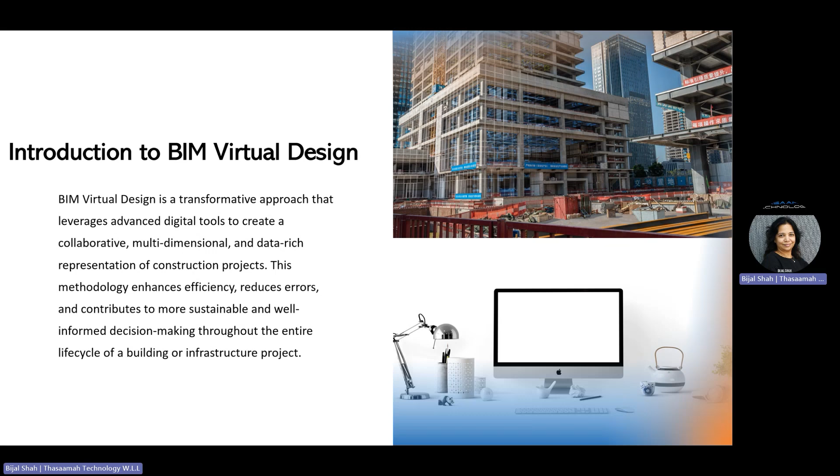So this was a quick overview where we came to know what BIM with virtual design is. Now let's check some of the benefits with that.

In case of benefits with virtual design, the first thing we come to know is collaboration, which is actually happening with BIM technology. But if we add virtual design integration on top of that, it promotes collaboration by breaking down silos between different disciplines. Architects, engineers, and contractors can concurrently work on the same model—that is something fantastic.

At the same time, it helps with visualization. It gives us a realistic, detailed design, providing a level of clarity and insight that was previously unattainable.

Efficiency is definitely increased and improved here. This particular technology, with integration on BIM, streamlines the design and construction process, and at the same time reduces the number of clashes and conflicts during construction. This leads to a more efficient workflow, minimizing delays and definitely cost overruns.

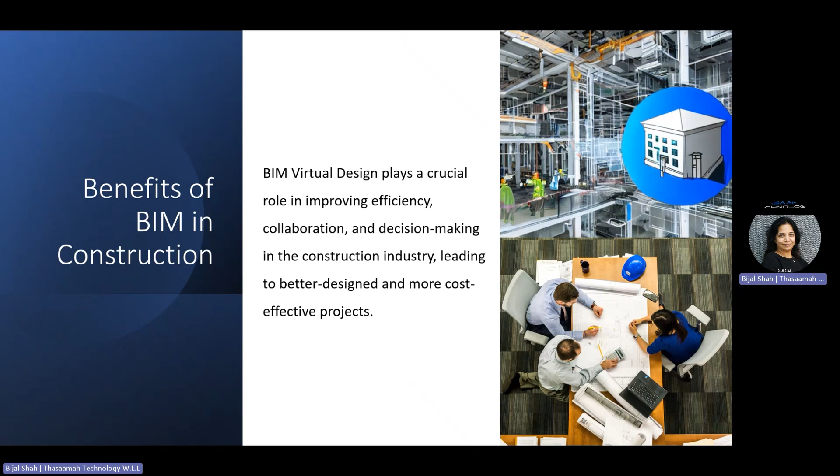Now, when we started our journey with BIM, we were facing some challenges. What were the challenges? We were not able to use multiple tools effectively. Okay, multiple tools were available, but there was no interoperability or integration between those tools. So do we have any solution for that right now? And if there is a solution, what is it, and how do we utilize it?

So in that case, we'll be talking about the challenge of data interoperability. We all know BIM is a technology, but there are multiple solutions and multiple OEMs creating and developing this BIM technology. So when we want to connect from one BIM technology to another, or create data exchange between two platforms, do we have a solution? Yes, we have a solution now—we can address that challenge with open BIM technology.

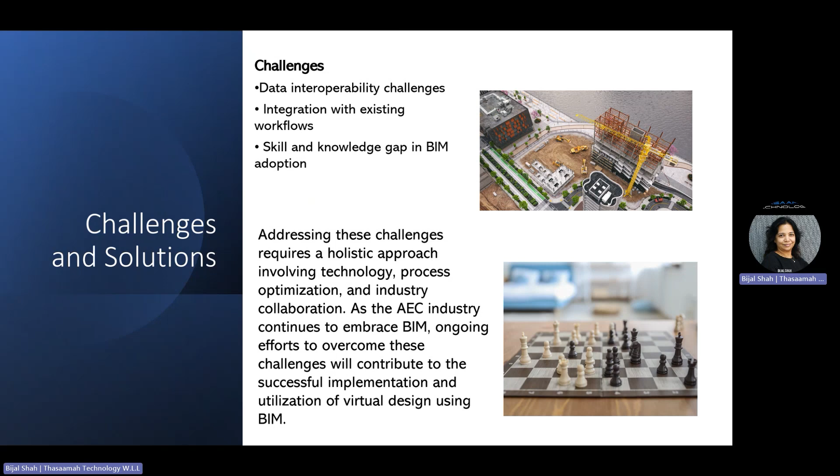I'm talking about implementation. So what all things should be there when we talk about implementation? The first thing is you all must have heard about BEP. What is that BEP? It's a BIM Execution Plan. So that execution plan should be there with clear project goals.

And at the same time, it should be a collaborative approach among the stakeholders. It should not be that way that one team is ready to adopt, second team is not ready to adopt, or one company is doing it, second company is not ready to accept it.

It should be simple and straightforward with a collaborative approach, and standard training with project requirements. With project requirement means what? In case I have done a training, I know the tools now, but where to utilize that tool? That is called a workflow, or else you can say that is called implementation.

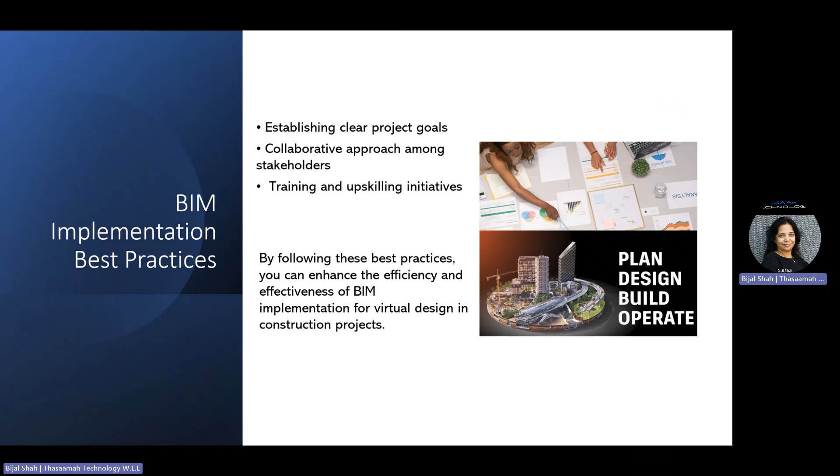So yes, training and upskilling initiatives should be there. By following this best practice, we can achieve efficiency and effectiveness with BIM implementation for virtual design and construction project.

Now, when we are talking about virtual design, there is a tool called virtual reality, a technology called virtual reality. So how does this particular virtual reality help us with our BIM technology? Let's have a look at one simple application which was launched a few years back with integration with one of the BIM technologies, Revit software.

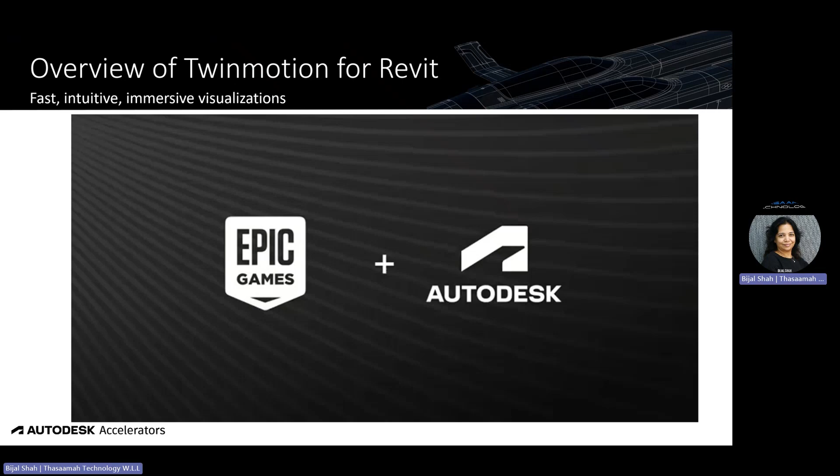And this tool is Twinmotion, a real-time visualization tool called Twinmotion. There was a simple collaboration that happened a few years back between Epic Games and Autodesk, and they came out with the solution of taking Revit models to Twinmotion for real-time visualization. So here is a small example of that.

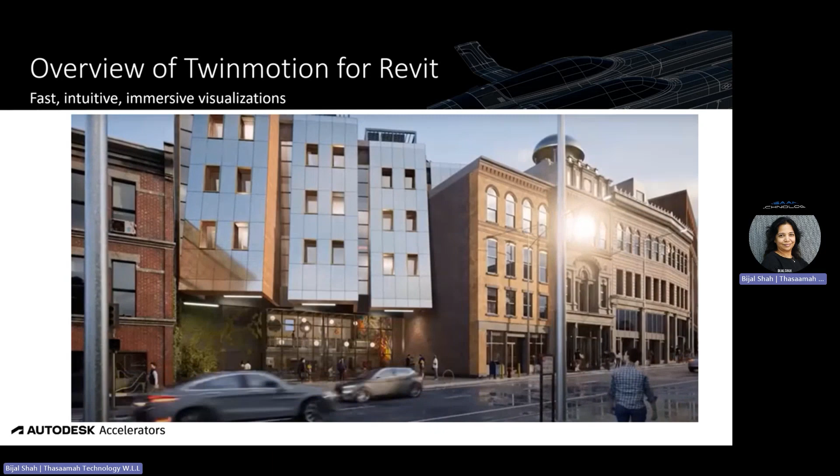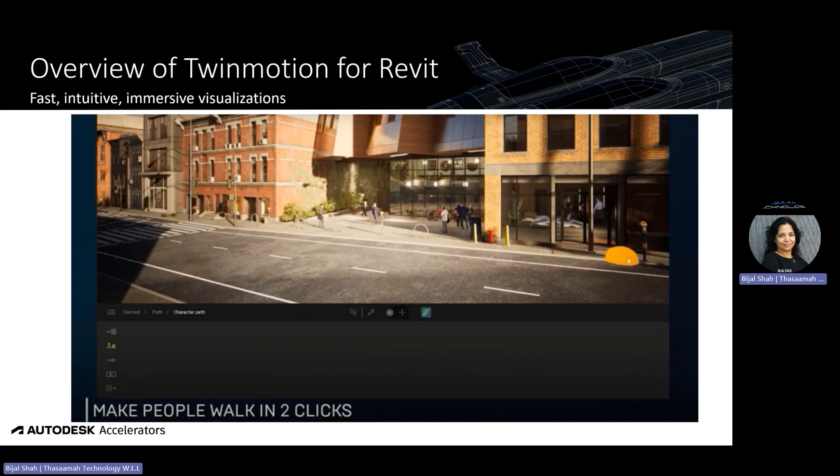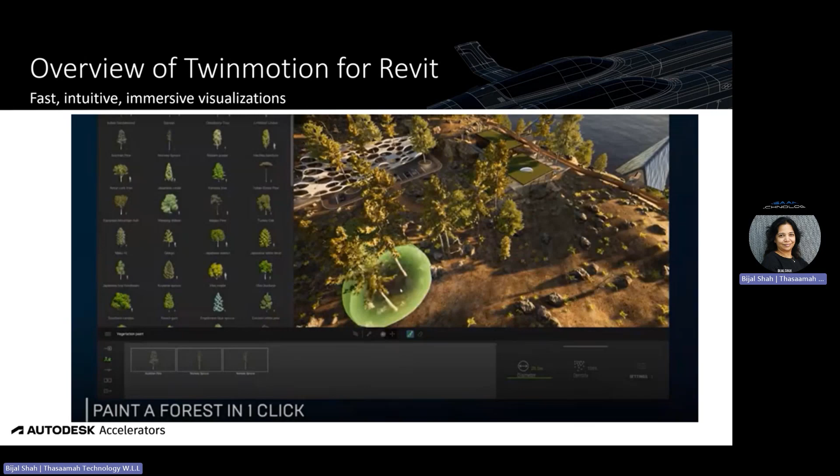The building has been modeled and it's getting updated or still modified in Revit. But at the same time, you are finding those changes in Twinmotion. This is called real-time connectivity, real-time visualization, real-time effects. So that is possible with the integration of the BIM technology called Revit and Twinmotion.

And let me tell you, Twinmotion is coming as an application as part of the Autodesk AEC Collection bundle pack.

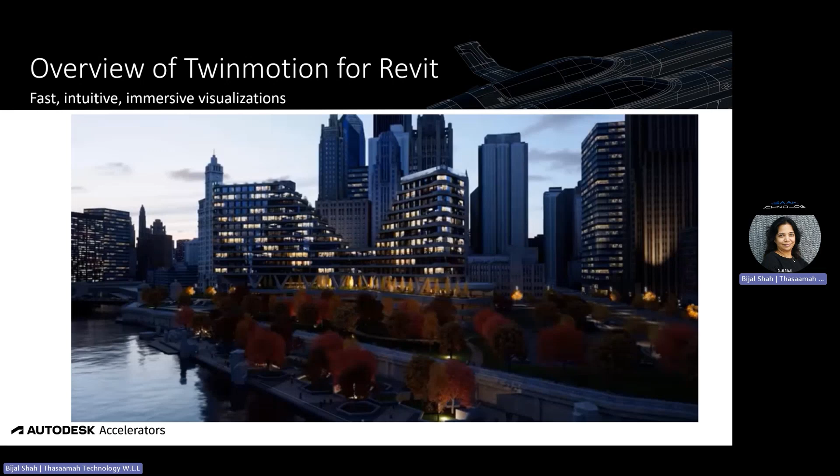We discussed one of the virtual design tools. Now let's discuss another one, called digital twin. BIM and IoT integration will come with digital twin. And this particular digital twin technology is available with Autodesk with the name of Tandem.

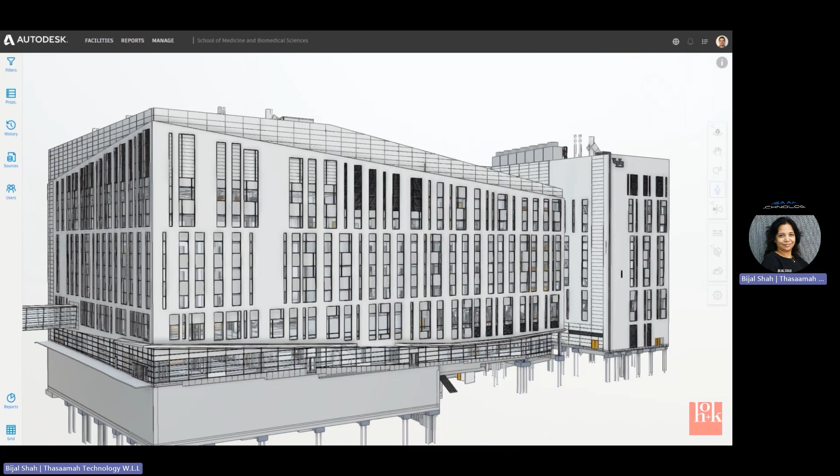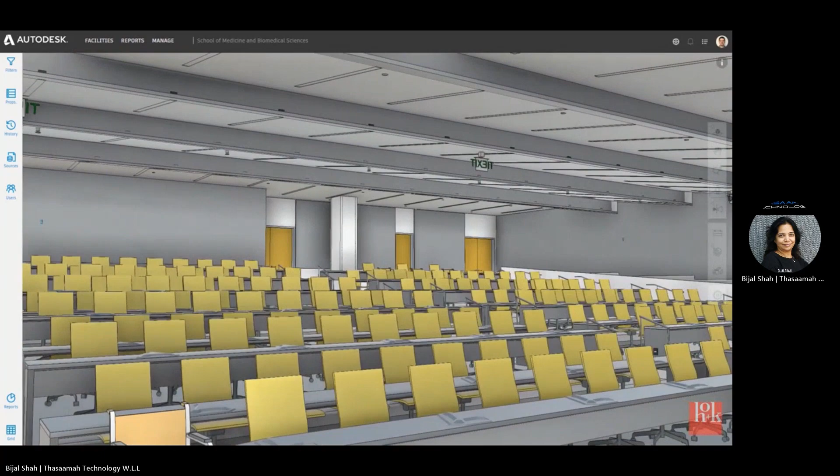So here I would like to show you one sample project where you can see a BIM model taken to Autodesk Tandem. Now Tandem is again a cloud-based application, so it does not require any kind of installation. But if I want a replica of my model to know the actual insights of the project, can I get that? So yes, before the construction site has even started, or you can say initiated, you can go and check everything with digital twin.

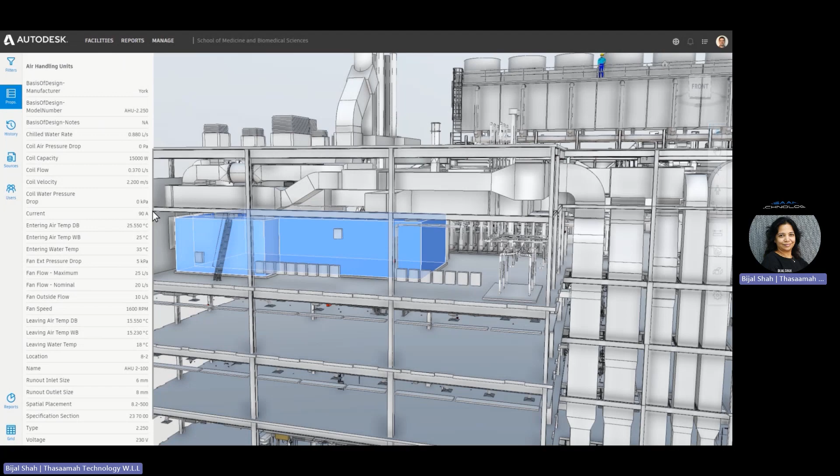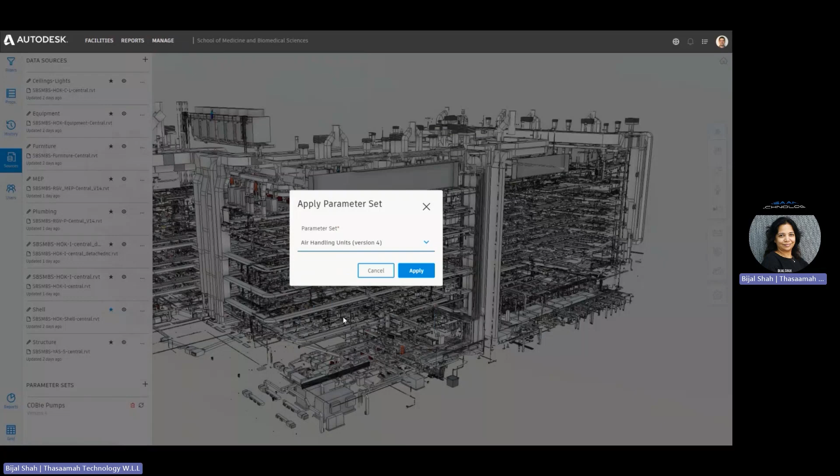So again here, what I understand the best thing coming out from this is avoiding conflicts during construction, avoiding clashes during construction, avoiding not only clashes and conflicts but errors during construction. So these are some benefits which we are able to get with a technology called digital twin and the solution called Autodesk Tandem.

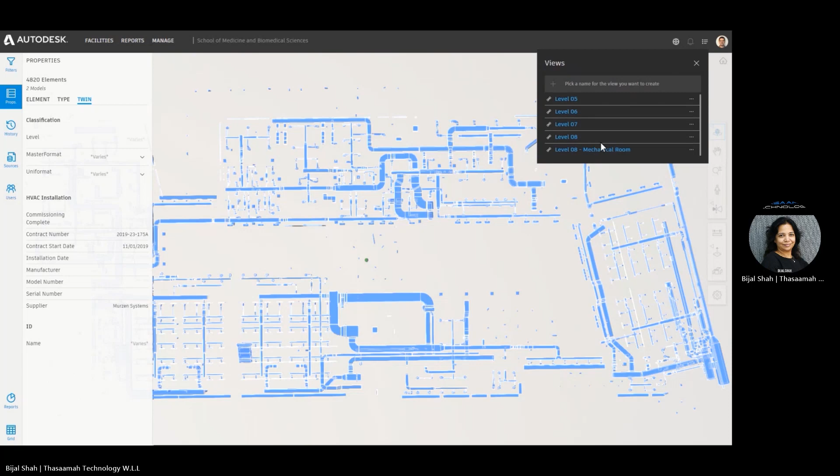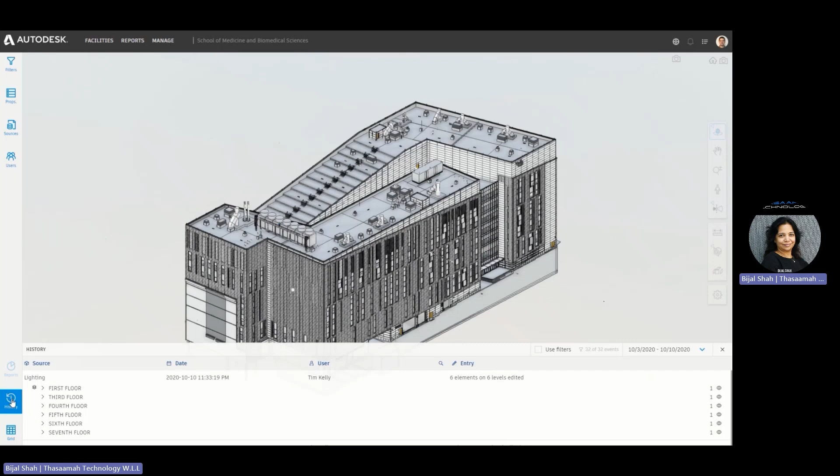So you can see on screen itself how simply we are getting all the information at the left side as properties, and the objects are clearly visible with all the changes whatever is required on the right side. And on top of that, this is a digital replica of your building or your construction. So whatever you are doing here, you can implement during your construction.

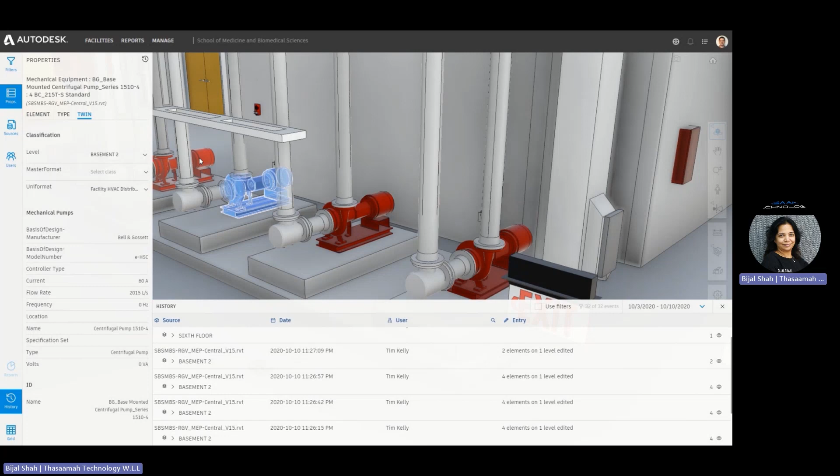And in your construction, it will come out with a result with less number of errors. So this is the benefit, the biggest benefit, what we are getting here with this technology called digital twin.

We discussed about technologies, we discussed the benefits of technologies. Now let's talk about a case study on BIM success. So again, I'm coming back to this HOK where they successfully completed a project by using BIM technology and virtual design integration.

They used Autodesk BIM technology. On top of that, they used Twinmotion as well as digital twin technology with Tandem. So these are the major things they used, and they came out with the best project outcome. At the same time, they utilized some cloud collaboration tools by Autodesk as well, which were a part of this.

So what all benefits did they find? They found collaborative design. They found visualization and simulation very easily. They found cost estimation and project planning success with minimum number of errors and with great effects on cost. At the same time, data integrations were very smooth, and facility management and operations were also included when they came out with the outcome of this project.